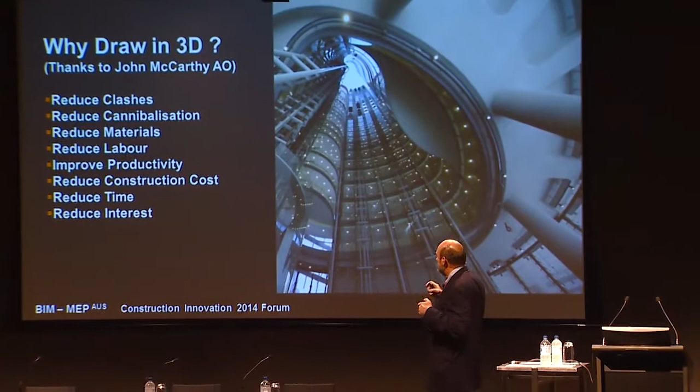One, I'm going to be able to reduce clashes. As a simpleton, I'm just thinking, okay, ceiling space, air conditioning ducts, sprinkler heads, lighting boxes. You do a set of 2D plans and when you get up there, you figure out you've got them in the wrong place. And I think if you eliminate that, that's great.

It's going to save a lot of time. It's going to save a lot of, I've started building and then I've got to pull it apart and redo it. So I save materials, I save labour, I increase productivity. I also increase morale on the site because people aren't pulling it apart and rebuilding it, so people think they're moving ahead as opposed to moving backwards. That will then lead to reduced construction costs, reduce my time and therefore reduce my interest bill. I'm a winner, I can't lose.

The guys said it's going to cost me, I don't know, ballpark, an extra 100 grand to embrace the technology. That was all I needed to do. It's a big enough project, get on with it, right? I know some people were saying, what sort of analysis did you do? It wasn't scientific, guys. Intuitively, it's going to be a good thing. And that was why I did it.

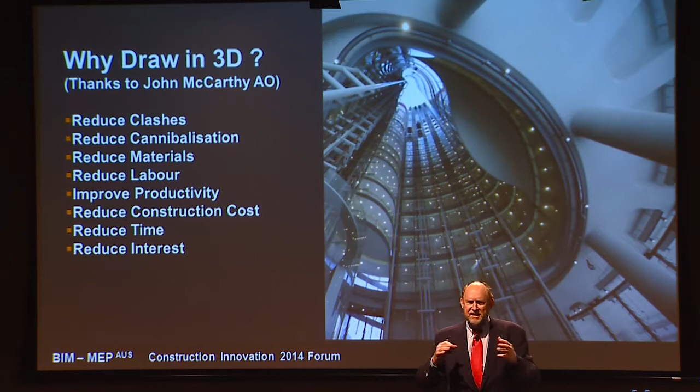But what I learnt through the process was I had bought a lot more than I thought I was buying. And even today, I was fortunate enough to go to a dinner last night with a lot of guys who are right in this field, and I'm sitting there thinking, I know a fair bit, I know nothing. The complexity and the capability of this stuff is huge, and it's fantastic, and the issue is you've got to get the message across, because the owners don't know it's there. And it is hugely valuable, and that's what I want to talk about today.

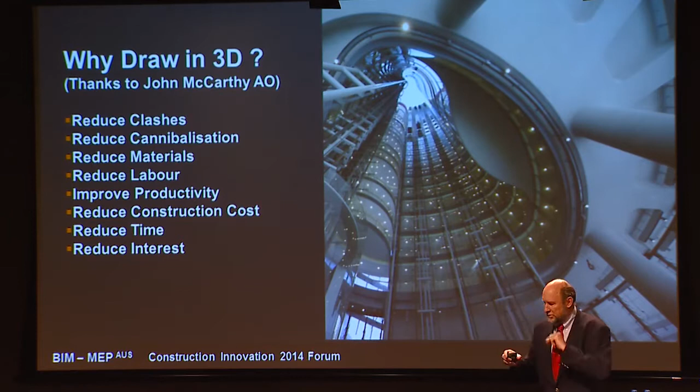So, moving on, let's just talk roughly through the site. We started out with a site here in the city. The site was misaligned to the harbour view. So here you see the harbour is down here, the street grid towards the harbour is there, the street grid back here is there. So we had a site.

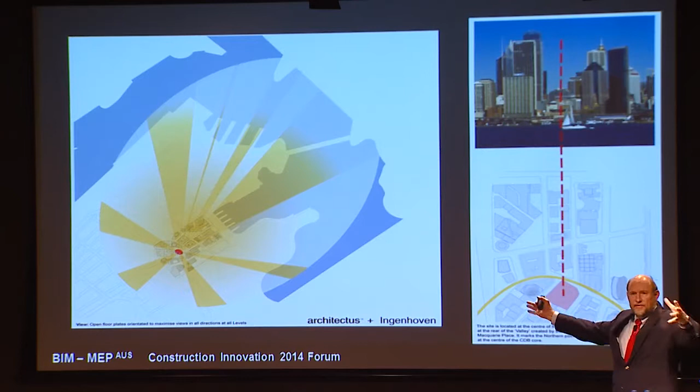So Architectus, in conjunction with Ingenhoven's in Germany, came up with the idea that rather than doing a square, boxy, rectangular building, we did a design competition for a building you could rotate on the site. We tried that with a box, didn't work, but if you did the ellipse, you got the bigger floor plate, and then you were able to do the view corridors. So you can see here all the different view streams between all the different buildings, and that's why we ended up with that design.

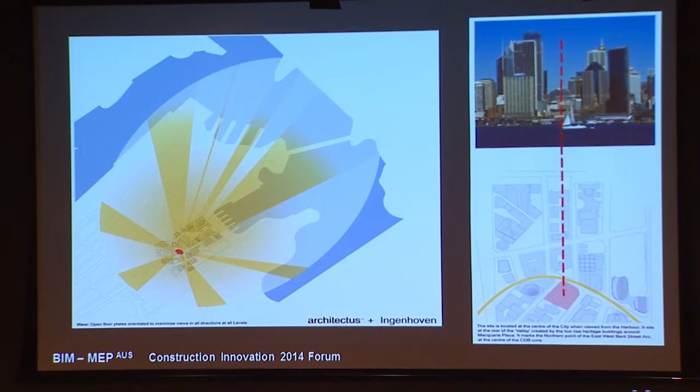And I've got to tell you, we had a design competition, and there were 5 of us on the panel. It was a blind competition.

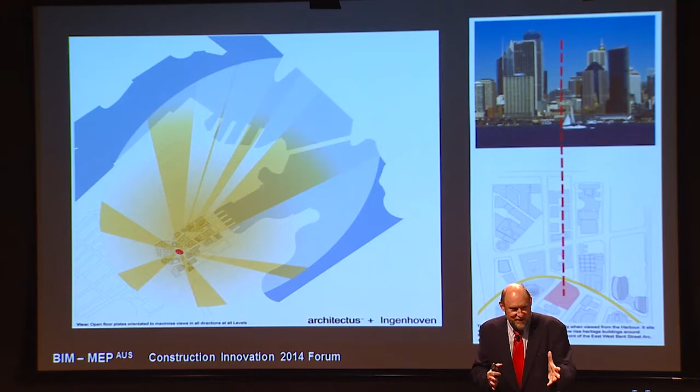We had no idea who put them in. We just walked into the room, we saw the models. It took us all of about 2 minutes each, and we all said, yeah, that's it. I've got to tell you, I also owned Australia Square, and I'm not the biggest fan because I struggle with the round building - I get lost walking around the core. But anyway, it surprised me, but I loved it, as did the rest of the panel.

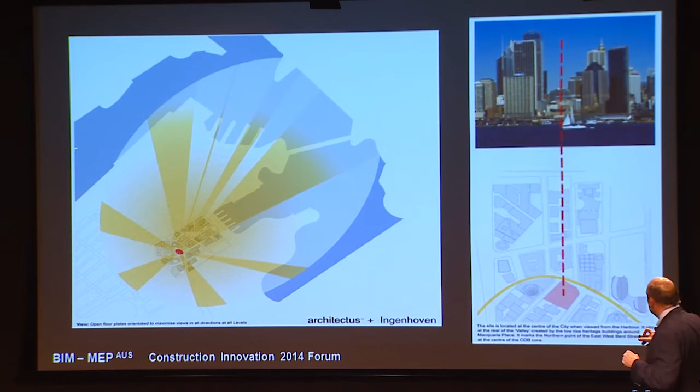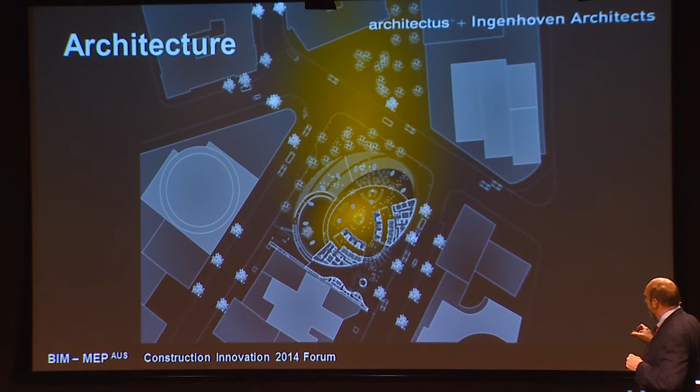So moving right along, what we ended up doing is an elliptical design with this heart-shaped atrium in the middle, and fairly significant floor plates, but you'll see that in a second. And what did we do?

So what I did was put an edict down and said, anyone who comes on the team has to embrace and adopt BIM technology. If you're not prepared to do it, don't bother showing up on day one - you won't get a job. Because we wanted 3D technology, and I didn't understand the stuff, I was just looking at the concept and said, guys, just do it. It makes sense to me, but if you're going to do it, everybody's got to do it, okay?

And what that helped is - you've got to remember, we were going for 6-star sustainability, never been done in the city of Sydney, the first 6-star high-rise in Sydney. And at the same time as we were doing this, we did one in Brisbane, which was 123 Albert, Rio Tinto's head office.

And I committed to these a year before the GFC. In this one I had a get-out-of-jail clause - I could stop construction after demolition and excavation for whatever reason I chose. That get-out-of-jail clause was available to me after the GFC, and I still went ahead.

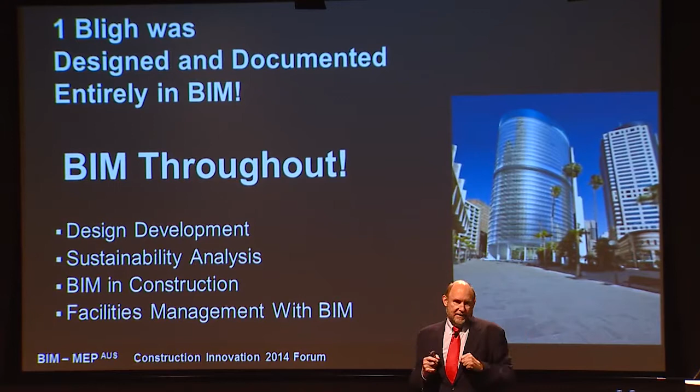Part of the equation I did in the analysis was: it's going to cost this much to close down, this much to go up, market's riskier, all these sort of things - but I'm going to add $20 million on the keep-going equation just because of staff morale, company image, the whole property market image, because it's important to have leadership and keep going. And so we did that.

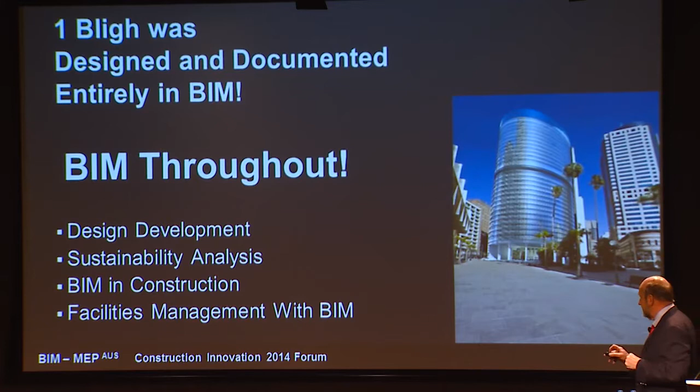We kept the BIM, and then obviously facilities management comes with the BIM as well. Strong commitment by us, the entire consultants team, all subcontractors - 32 parties. There's a quick snapshot of the building.

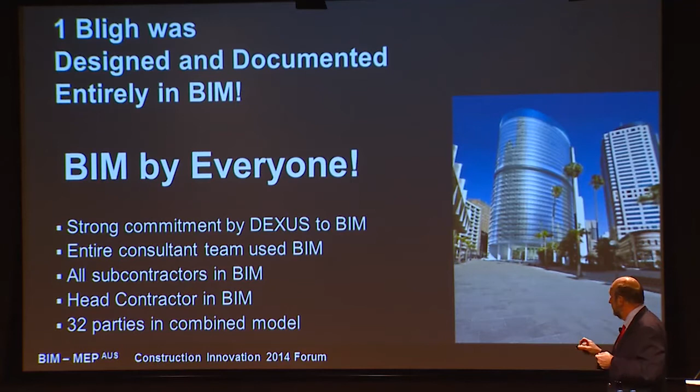If we go to the next one, we'll probably see it a bit more. Okay, so we appointed Architectus as the BIM manager. It's very important to have one central control - you all know that anyway. Everybody's on the job, and the important thing is to get all the ground rules up front.

The real issue here is communication - get everybody communicating. The thing that's very important in putting a team together to develop a building is it's great to have a lot of A-grade players, but I've got to tell you, I'm happy to have B-grade players as well, as long as I end up with an A-grade team. That's the most important thing.

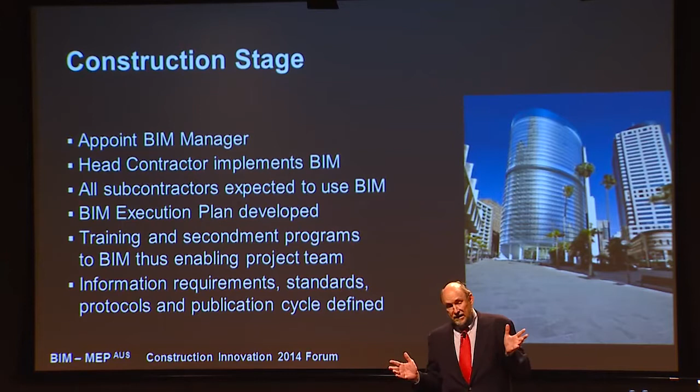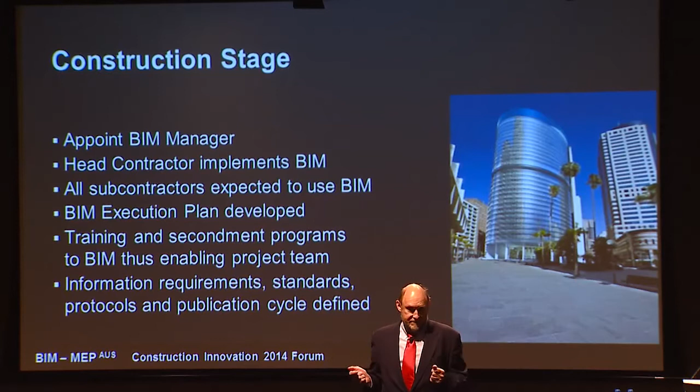Forget about having prima donnas - everybody's got to check their egos at the door. Everybody has a contribution to make, no one has a monopoly on good ideas. In fact, the dumbest guy in the room can make the best contribution to a job, don't forget it. That's because everyone else, as long as they check their egos at the door, will listen, and the dumbest idea that gets thrown out will stimulate thought in someone else, which will help grow the idea into something that could be a winner for the team. So don't think because you're the smartest person in the room that you've got it all.

It's a team effort. I want an A-grade team, not a team of A-grade players. It's nice to have both, but the most important thing is a team that works together and creates an A-grade team. Okay, moving on.

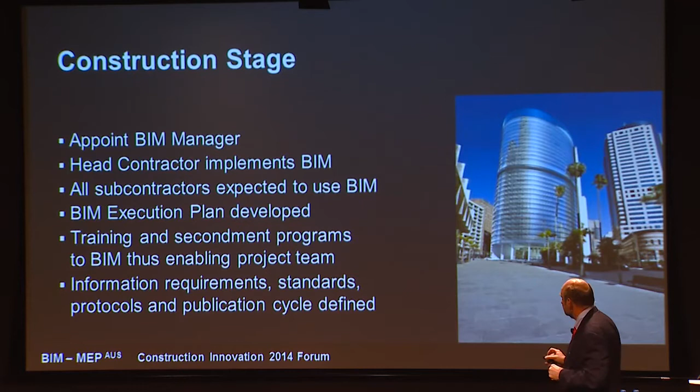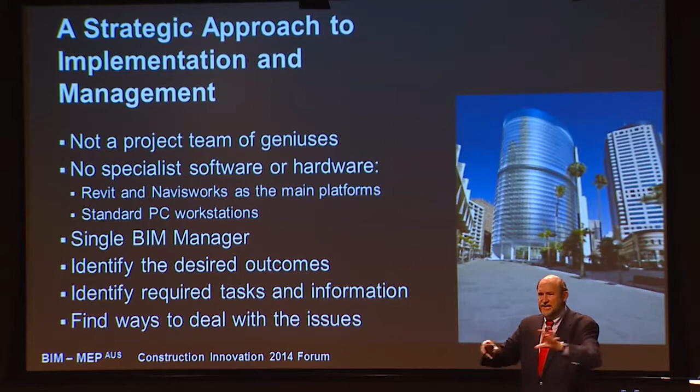As I said, not a project necessarily of geniuses - it was not specialist, it was just Revit, Navisworks. Desired the outcome, set the tasks, find a way to deal with the issues, coordination meetings, all that sort of stuff. That's detailed - you guys know how to do it. I, as the owner, don't need to know. I just need to know that I've got capable people dealing with it.

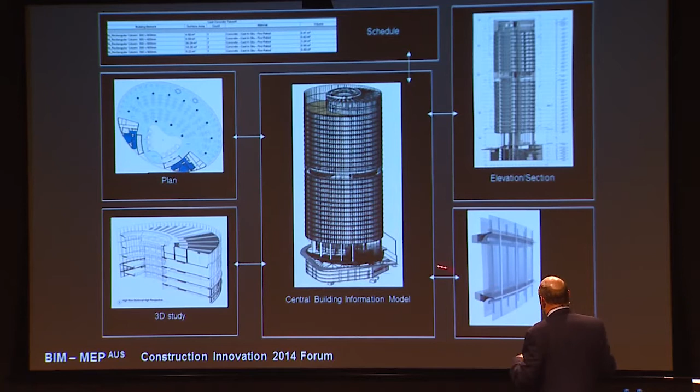Here's a simplistic view of what I see as an owner. I'm saying, okay, what have I got? I got a 3D model, that sounds great. Straight off that I can go to the plan, the study, up to elevations, up to takeoffs for the various schedules, and it can help me in design development and all that sort of stuff. So that's what I saw going in, and I thought, this is great, let's get on with it.

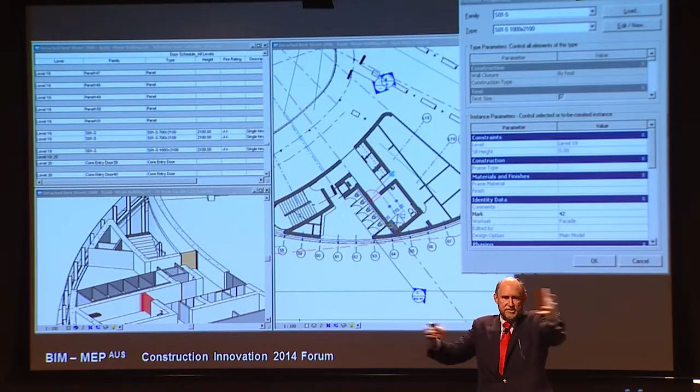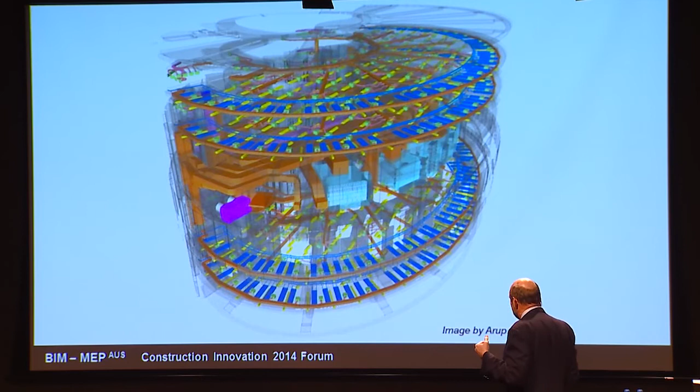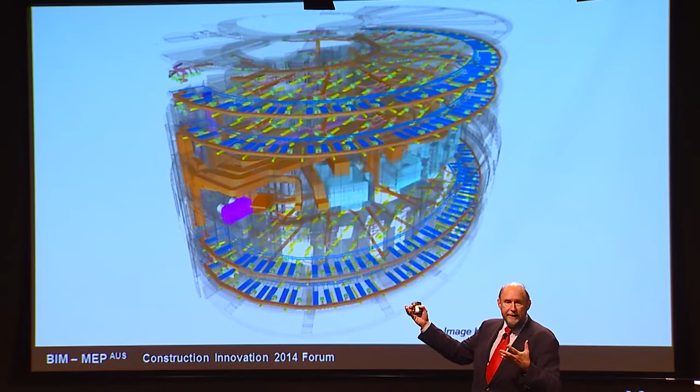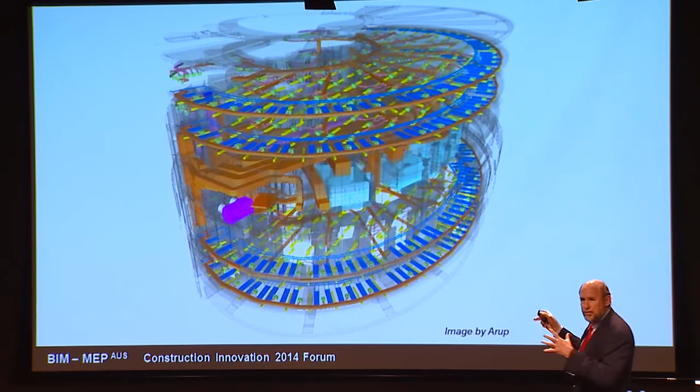Here's the mid-rise plant level, with typical floors above it. For a normal layman like myself this looks daunting until you realise what we've got here is big floors that are oval shaped. The dark blue shows we actually have a number of forms of air conditioning. We've got normal VAV in the middle, but chill beam all around the outside. We've got a columnar grid about 9 metres in, and cantilevered floors, which we'll talk about in a minute. So you can see huge complexity, and only through the BIM process do you eliminate a lot of the clashes.

Now we go down to the basement, and here you can see all the stuff down there. You've got to remember, we are leading edge sustainability. We're going for tri-generation. We had solar on the roof, normal off the grid, and turbines in the basement for backup. So we had all that sort of stuff.

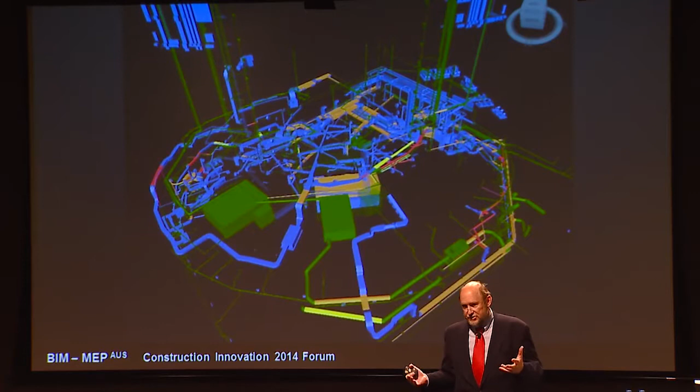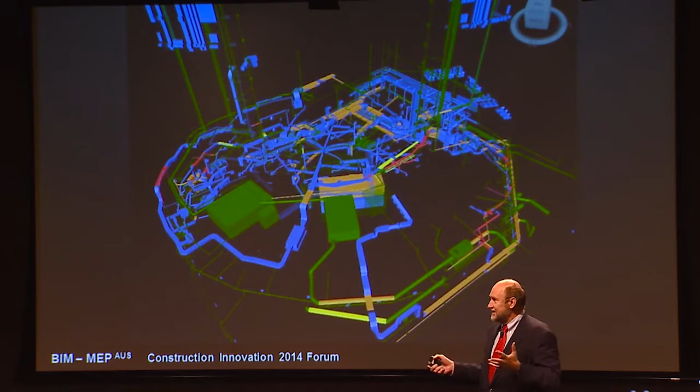In addition to that we had water recycling. We were harvesting water off the roof, and we had the first black water sewer in the building, doing black water recycling, using that water for the cooling system and all that sort of stuff. So multiple systems, pipes and everything going everywhere. You'd hate to think it's going in the wrong place. BIM is the sort of thing that's going to get you there and make sure you don't make the obvious misconnection. So, a great system, conceptually designed. This is fabulous, let's keep going.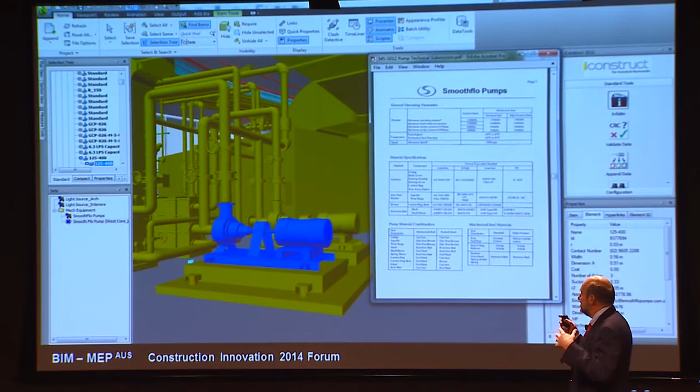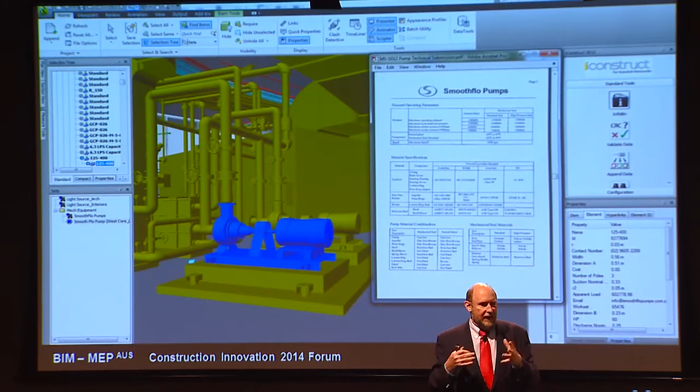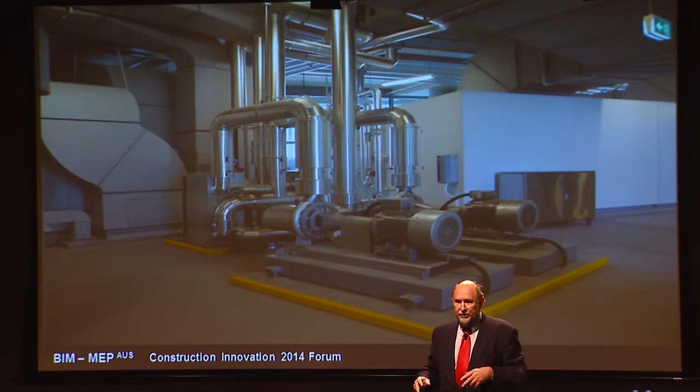Here's a typical plant room we're doing on the mid-rise. One of the things with One Bligh is it's a glass building, and it's not only glass on the outside, it's glass on the inside. As you come up in the glass lifts and pass the mid-rise, which is glass, it's on display. So what did we do? We designed the plant room so it'll be on display, nice and pretty, but all again done through BIM technology.

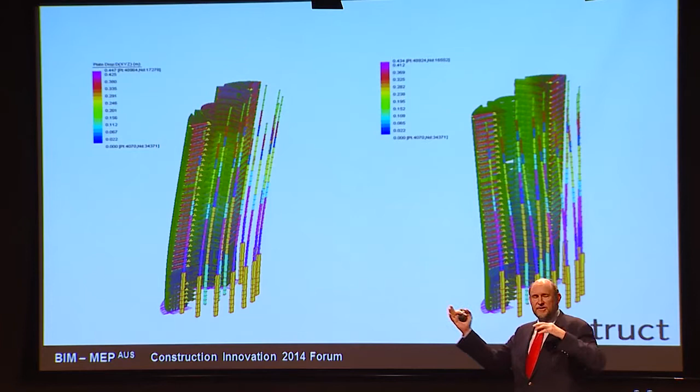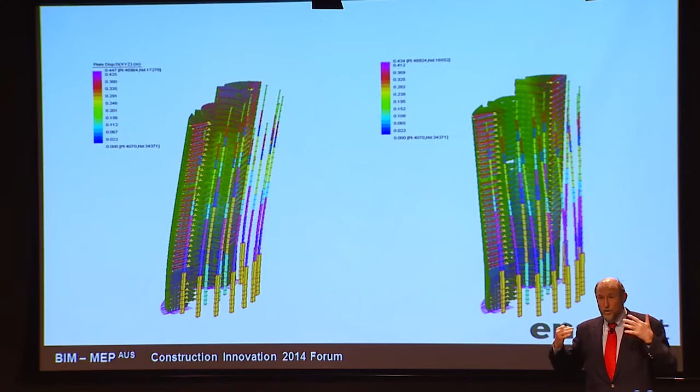Now, that's what I thought I was buying. But what I got, and I didn't appreciate it because you guys hadn't educated me at this point, is a whole lot of extra things. With the technology we're able to do a whole lot of sensitivities on the stresses on the structure of the building, and as a result we were able to use recycled steel. An obvious thing for the engineers in the room, but all of a sudden you've got a tool that helps you analyse what's going on.

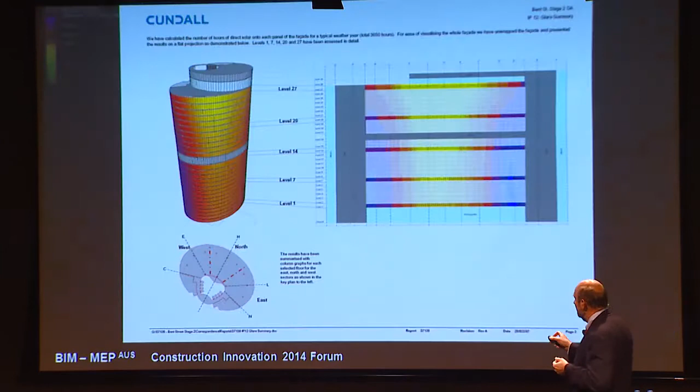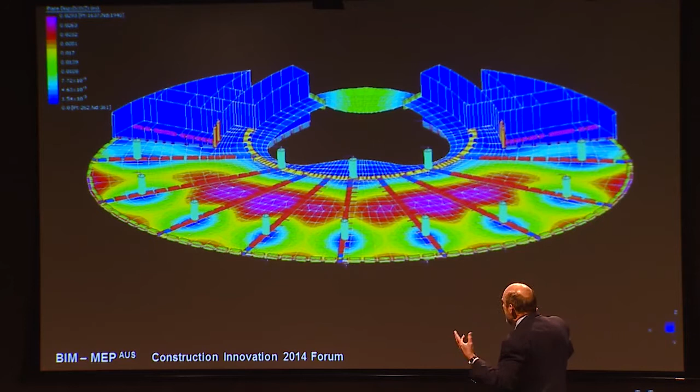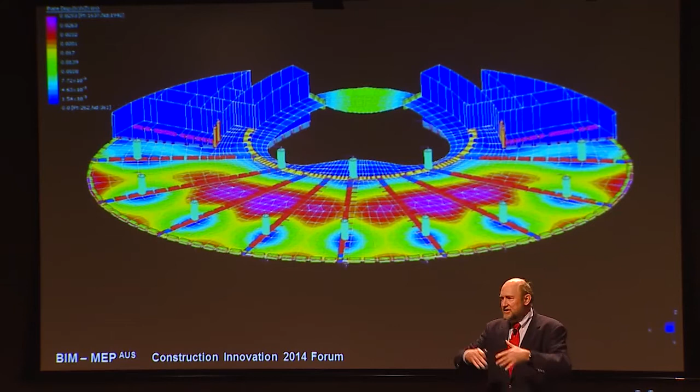Another area I got a benefit from: here's a typical floor. We've got a columnar grid all the way around, 9 metres from there to there, so there's a big overhang. Then we've got an atrium in the middle of the building, the cores at the back, and a bridge across here. All of the different structural loads and that sort of stuff is over my head - you engineers get your rocks off on this, you'd love it. But here, all of a sudden, you've got a chance to analyse it as part of the BIM model. So this must be fabulous to have it all integrated - you do the work, it's in the system, and everybody gets it in a coordinated fashion. Moving on, the slides are getting ahead of me here.

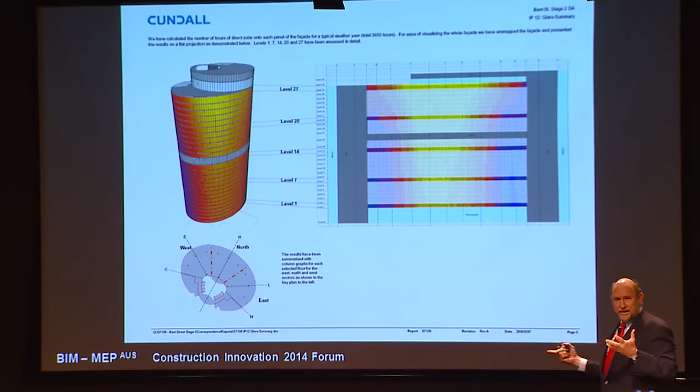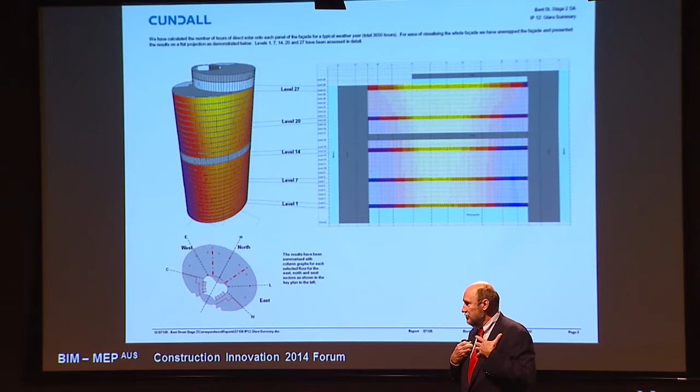Here we are on the outside of the building. We're able to look at the sunlight and the heat on the outside of the building, and what the impacts are given the location of where we were. So again, it's another tool, another extension of the BIM capability. When I made the decision to go with this, I had no idea I was going to get this benefit, but it gave us a whole lot of technology and extra stuff.

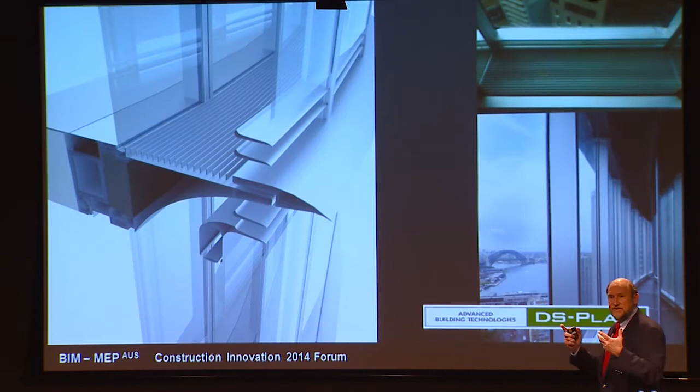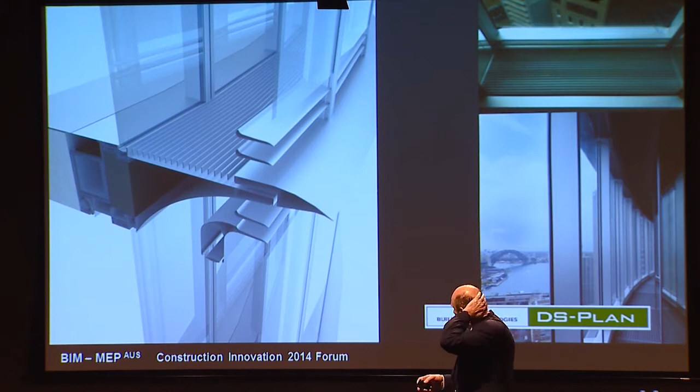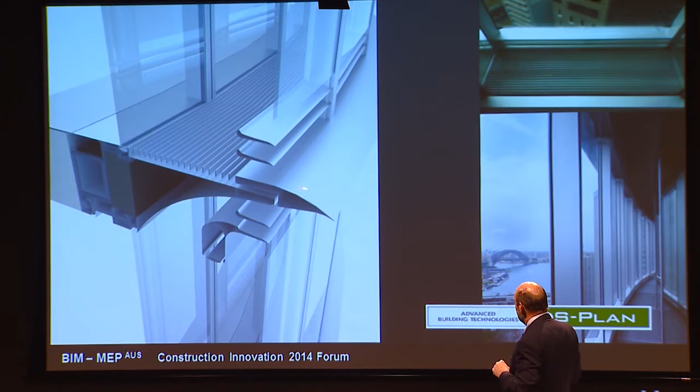Here is some of the detail on the window. As you may or may not know, it's a double curtain wall. We've got the inside curtain here, then about 600mm of space, and then a second wall - a double glass facade. It works just like a thermos, except instead of being completely sealed in, the air on each floor comes in at the bottom of every window, goes up, and comes out the top. You can see it just there, it comes out the top. So it all just works.

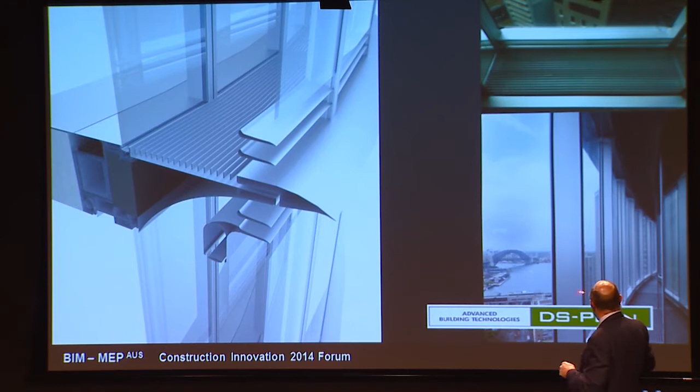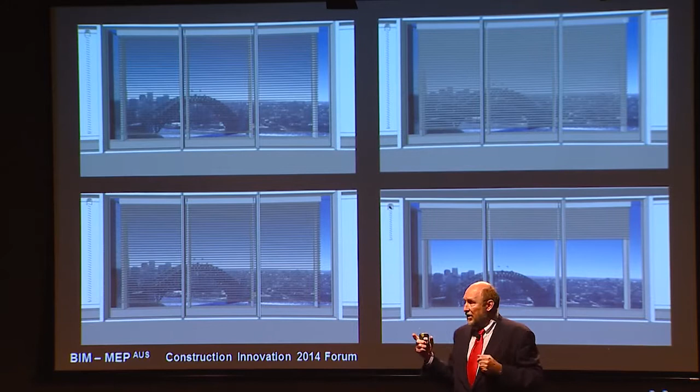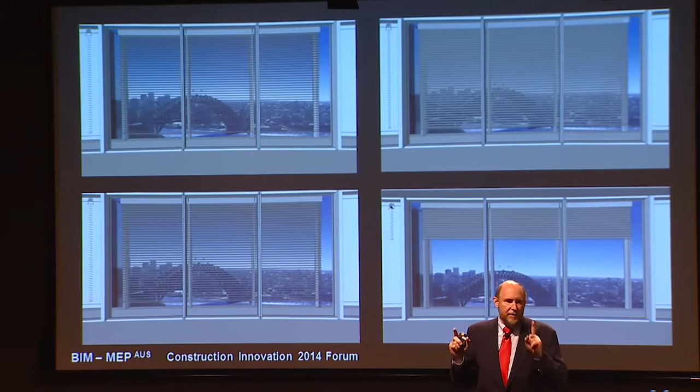Then, on the next one, you can see the gap. On the inside panes, we put blinds, and we put sensors on the outside, on every mullion all the way around the building - individual sensors to detect sunlight. So every single blind is computer controlled as the sun hits it. If you look at the building during the day with an hour spare, you'll see the blinds coming down sequentially as the sun moves, so that absolutely no pane of glass will have direct sunlight on it at all.

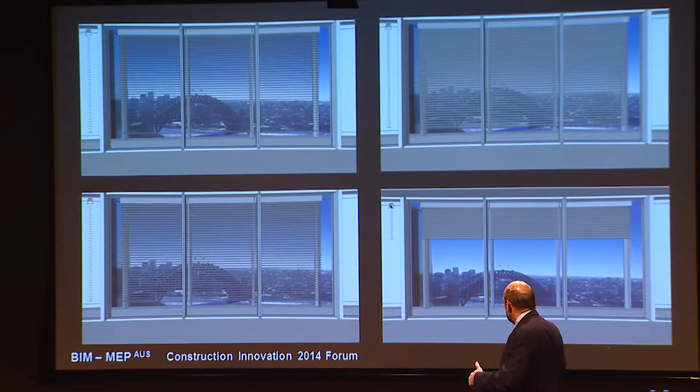That has a huge effect on the air conditioning loads going into the building. So that was all of what we had going into the building.

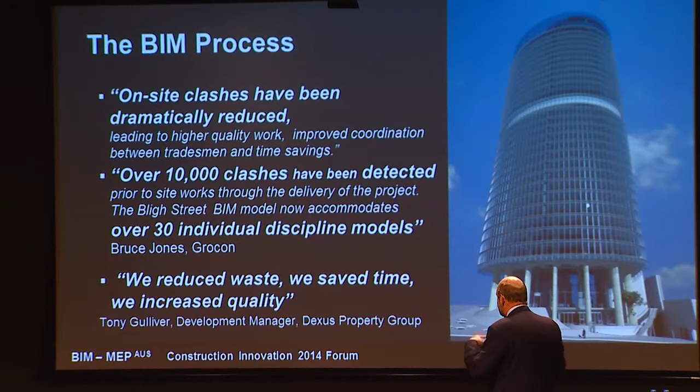Okay, so let's talk about the process. On-site clashes, as you heard on the video, we got rid of over 10,000 before we even started on site, and there were more on the way, so obviously we didn't detect them all, but we got basically the whole lot. We reduced the waste and increased the quality.

This is something I hadn't really appreciated when I committed as well - because of using the BIM technology, the tolerances that you can get away with get refined. So you get a more definitive building, a greater quality finish than you could if you didn't have the BIM technology, because otherwise you've got to make allowances and all that sort of stuff. So it was a lot better.

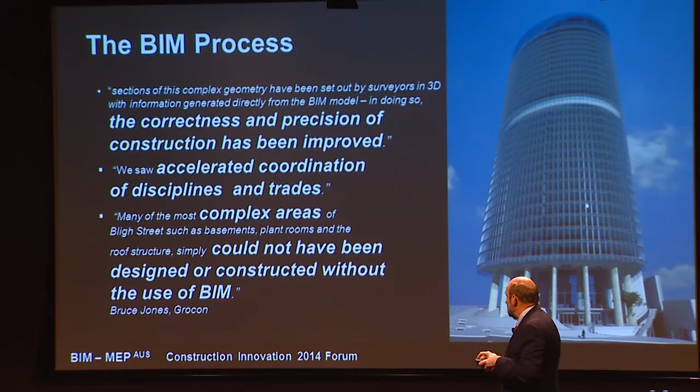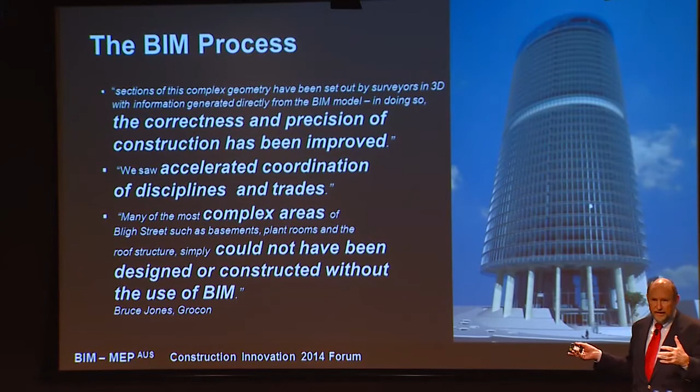Accelerated coordination. The building was immensely complex. You've got to remember we had the atrium in the middle, we had the glass roof - you'll see it all, just horrendously complex going through the thing. Really, as was said on the video, it couldn't have been constructed had we not used the BIM technology, or if it had, we'd still be building.

So what did we get relative to what I thought we were going to get? Yes, we got reduced clashes, reduced cannibalisation, reduced materials, reduced labour. We got improved productivity, reduced tolerances, and higher quality finishes.

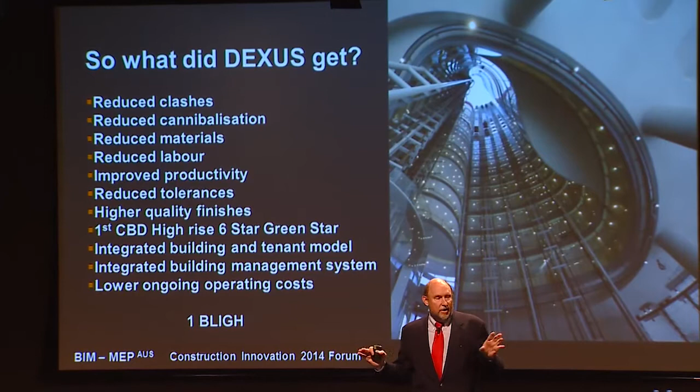What I didn't get that I thought I was going to get is a cost saving. The reason is we were early on in the piece - we went to tenders with a number of builders, and none of them had embraced this technology. We were ahead of the builders, and we told them to come on board, trust us, you're going to get a benefit, but they priced it without giving us the benefit. So they got whatever the benefit was.

Notwithstanding that, on this particular job we used Grocon. You've got to remember we went through the GFC, so they had a number of pricing challenges given the complexity of the whole thing. I've got to tell you, Grocon did an absolutely stunning job - first class, I'd use them in a blink.

The deal I had with Daniel Grollo is we signed a contract, we shook hands, and I said to Daniel, as far as I'm concerned I'm never going to look at that contract. The day I ever have to look at that contract, you and I have a major problem. There's a phone there if we've got a problem. It's fixed price - see you at the opening. And to his word and to my word, that's how it went.

$300 million - the project is an $800 million deal, and the construction was roughly $300 million. Not one variation, and on time. Hats off to Grocon - stunning job. They committed the team, and they had to put extra labour on at the end of the job to get it done.

I can't say enough about Grocon. That's not to say there aren't other builders in town, but I had a great experience.

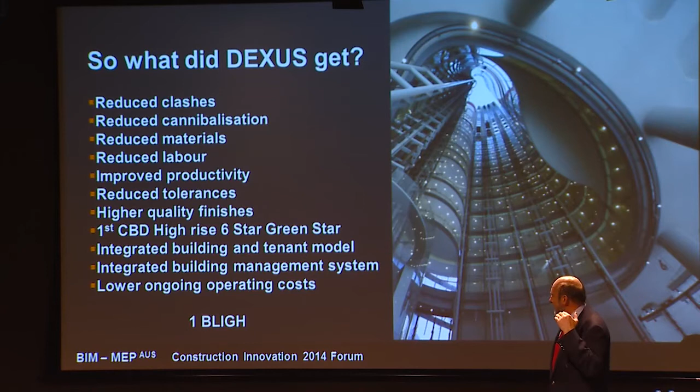So what did we get? First, CBD high-rise 6-star in Sydney, integrated building and tenancy model, integrated building management system, and lower operating costs. As a result of putting this in, we're now able to manage our building.

Now, having sat there last night, and now that I'm retired, I can become an information sponge. I just love going to meetings and listening to people. I travel the world looking at different investment opportunities, stem cells, this and that. Even last night, I go to the meeting, the guys are talking about what they're doing, and I'm sitting there thinking, this is stunning.

What I hadn't realised, and we didn't use it as much - well, they may have used part of it behind the scenes, didn't tell me about it, I was only the CEO - is what they're now doing: you use this now in all the procurement process. You just extend your BIM model through, you go straight through. How fabulous is that? All this data comes through and that's going to even more facilitate the ongoing management of the building.

The other thing I don't think we did is use the BIM model to manage the timeline. I was talking to the guys last night, and they're saying now that we've got the model, we can do a more detailed analysis of your scheduling process. So what you think is your normal timeline, if you do it a different way, we can take 8 weeks off your craneage time. And I'm thinking, crikey, all that money I could have saved.

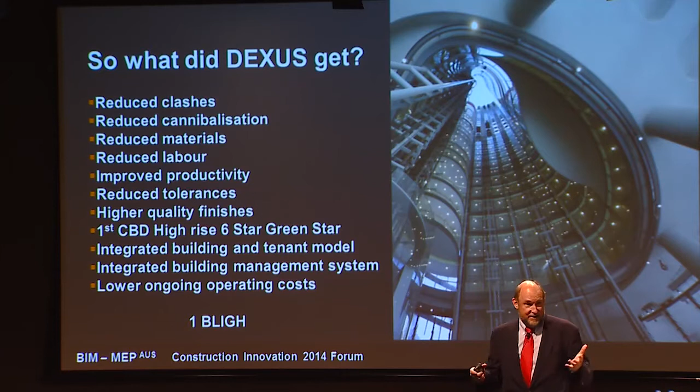So that was 1 Bligh, and here's what we achieved: an environmentally sustainable building. We had 6-star Green Star, 40% recycled concrete, 90% steel, timber, solar cooling, trigen, water, black water, rainwater, sewer mining, and a naturally ventilated atrium all the way up.

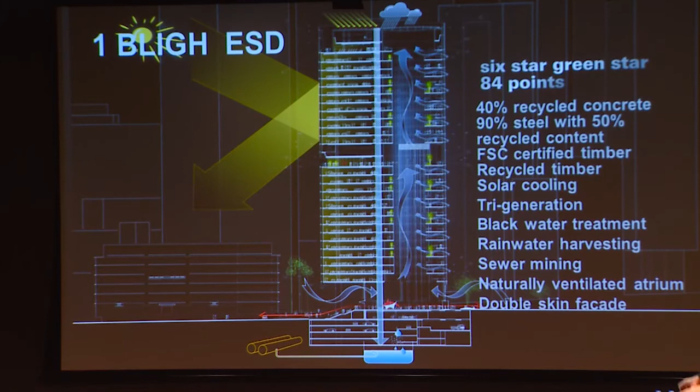We've got louvers, we've got these huge doors that come up at the ground floor, so you've got ventilation there, ventilation all up through the side core, double skin facade, and we've got a childcare centre down the bottom - the whole works and jerks.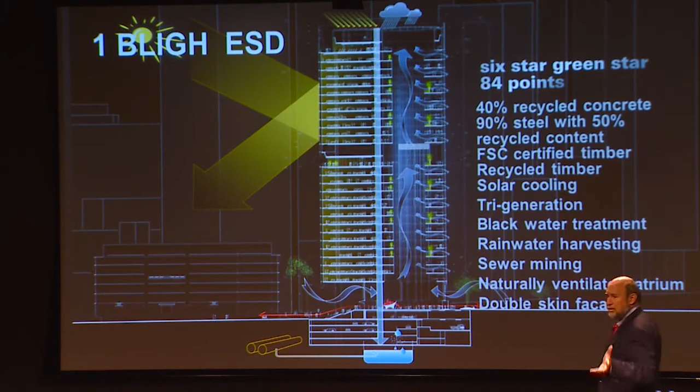I am incredibly proud. The only thing I'm really, really ticked off about - I was twice president of the Property Council, and my successor as president said this was the most stunning building on the horizon, but we didn't win the award last year because Lendlease came along at Darling Harbour with Commonwealth Bank and knocked me off the perch. But notwithstanding that, they did a great job too.

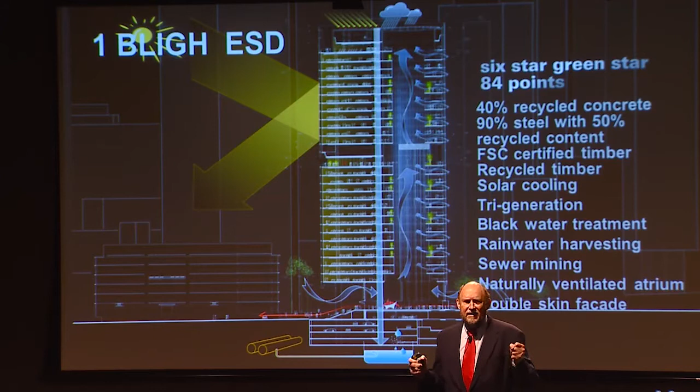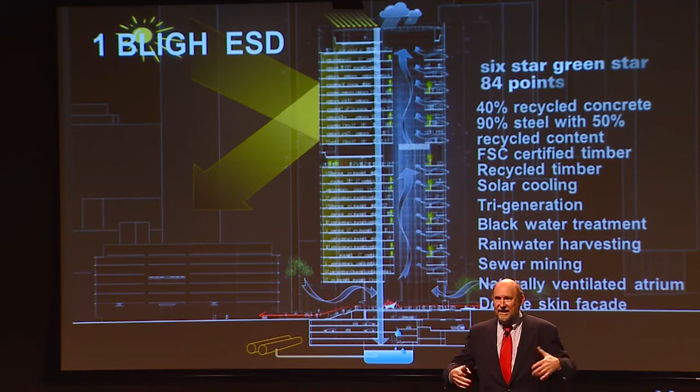And that's one of the beauties about what we're doing here. We are in a world where we're competing like crazy, but we're all doing things that collectively help the knowledge base of all of us improve. And so collectively we can all go forward. That was one of the joys I had at PCA, and I'm going to talk about that in a minute.

Okay, so what of the future? One, build on past achievements - don't just sit there and say we're going to repeat what we did. Look at what we did and ask what can we learn from it and how can we improve upon it. Embrace technological change. Don't sit back and rest on your laurels - you'll get knocked off the perch. Just keep thinking about ways to improve. As I said, no one has a monopoly on good ideas. Listen to everyone, consolidate, and make a call.

Next, when I was president of the PCA, one of the things we do is benchmark buildings - for instance, commercial buildings. We've got standards that basically say how you can assess whether a building is A, B, or C grade, with all these different criteria. I'm currently, for my sins, chairman of a similar committee within PCA doing the same thing for industrial properties, and we hope that will get launched before Christmas, so there'll be a grading system in industrial properties. I would encourage you as an organisation and as participants to give up some of your time to help the industry develop commonality of standards and terminology, and get it all on a level playing field so that consumers can understand it.

As an owner, I want a system that can talk to another building. I've got a portfolio of properties, or I did have, and I want a common system across them all. Ideally, I'd like a central control post for my whole portfolio. I'd also like systems such that if I buy or sell properties, I can just bring them in, connect them up, and away I go.